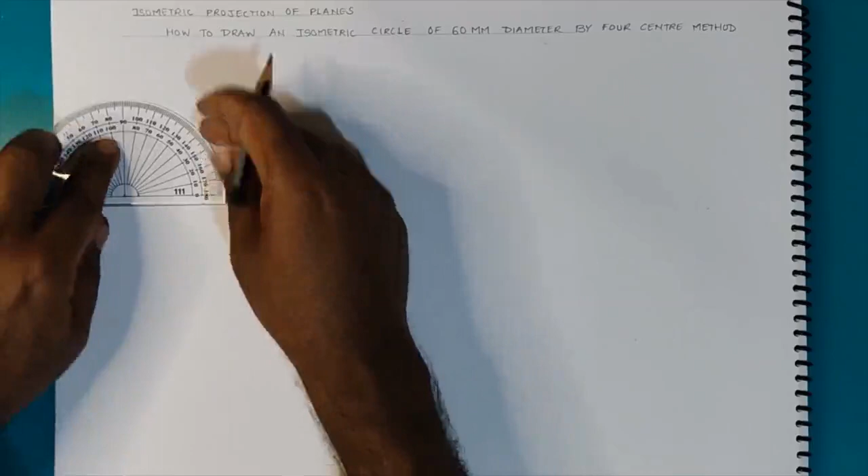We start the construction for the isometric circle by first drawing the isometric scale. We draw the horizontal x-axis and vertical y-axis, and lines inclined at 45 and 30 degrees. We use a protractor to find the angular divisions, then construct the lines as shown.

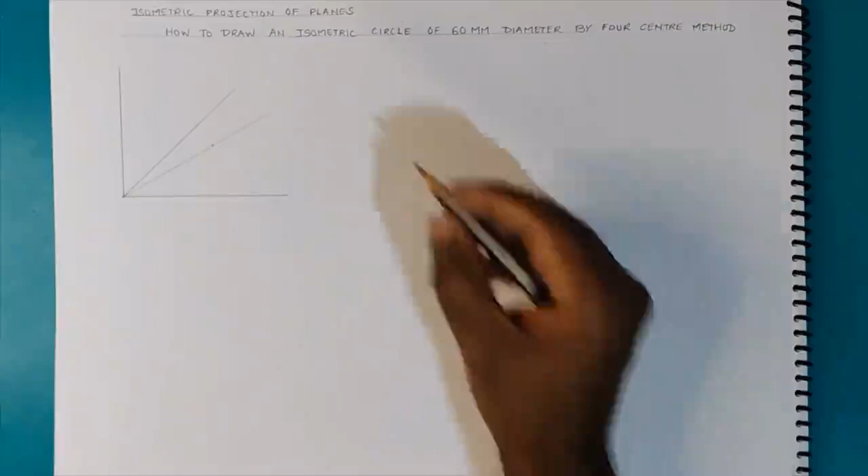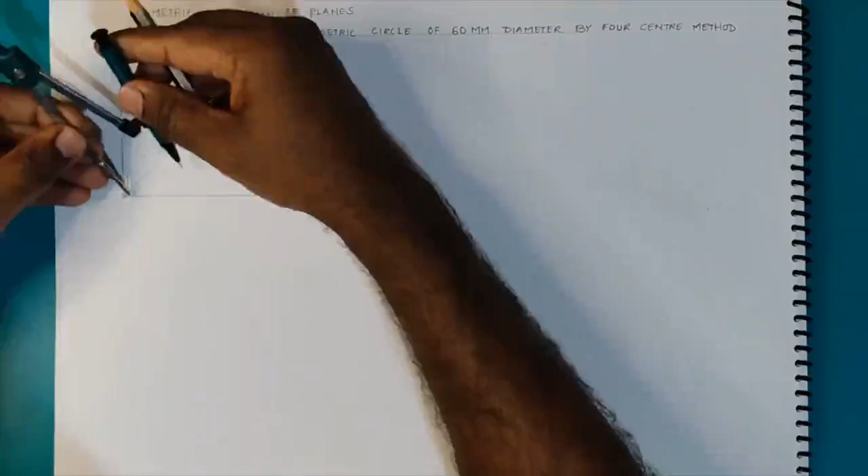I'll be taking only the distance that is required. Here the radius of 30 is required, so I take a distance of 30, and since I may need a 60 mm distance as well, I take 60 mm on the true length axis, that is the line inclined at 45 degrees. I have taken these two divisions, and this represents the true length.

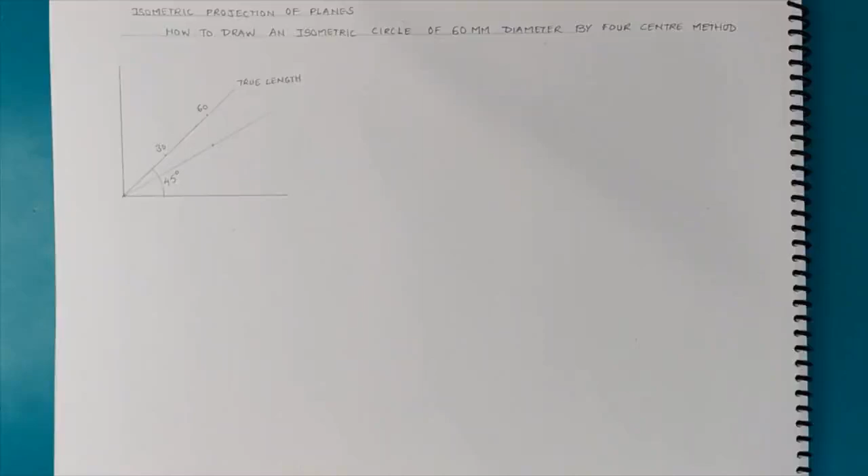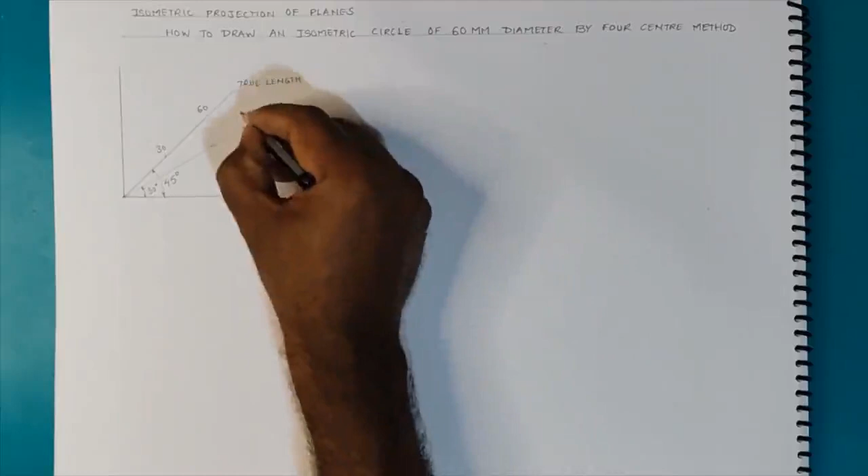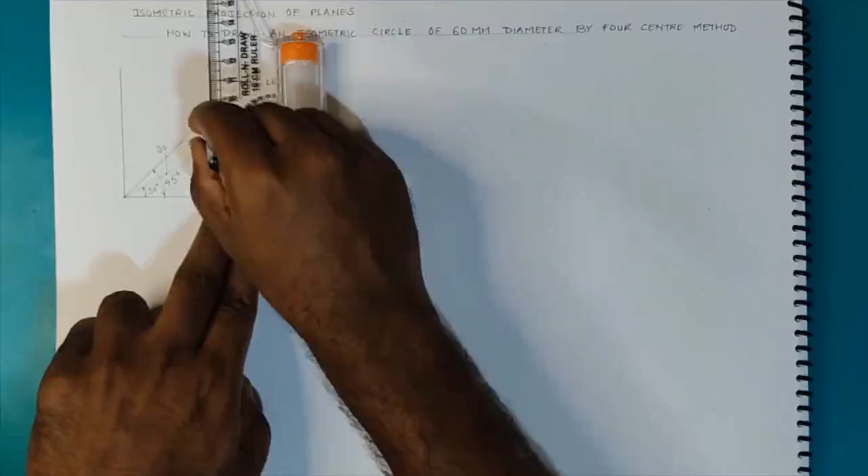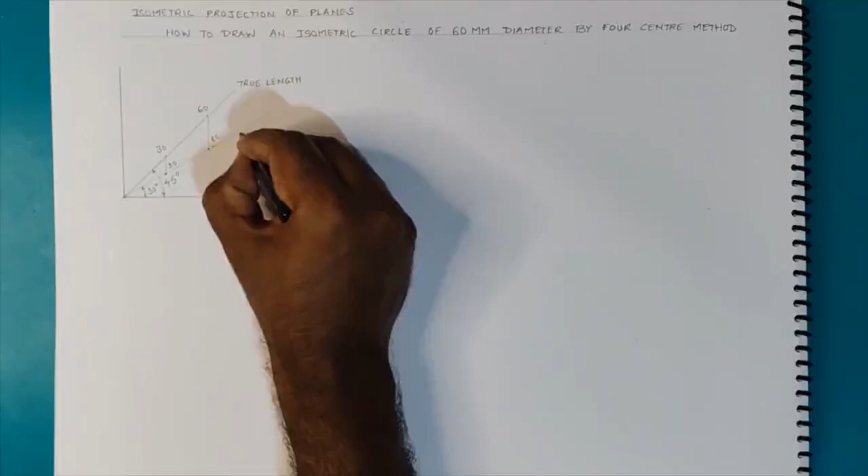From these two divisions I'll be drawing perpendiculars onto the line inclined at 30 degrees. From the 2 points I had marked earlier, I draw perpendiculars to find the intersection with the line inclined at 30 degrees, as shown. These points are the isometric lengths of 30 and 60 mm, so I mark it as isometric length.

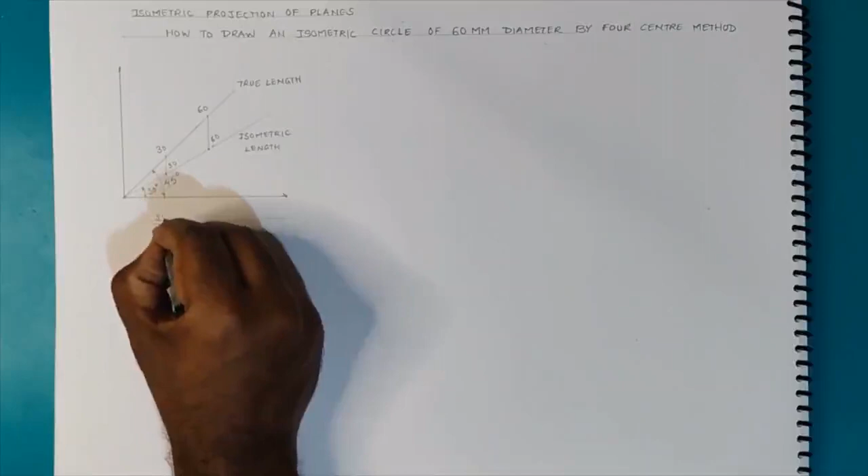Now this is the isometric scale for the given problem.

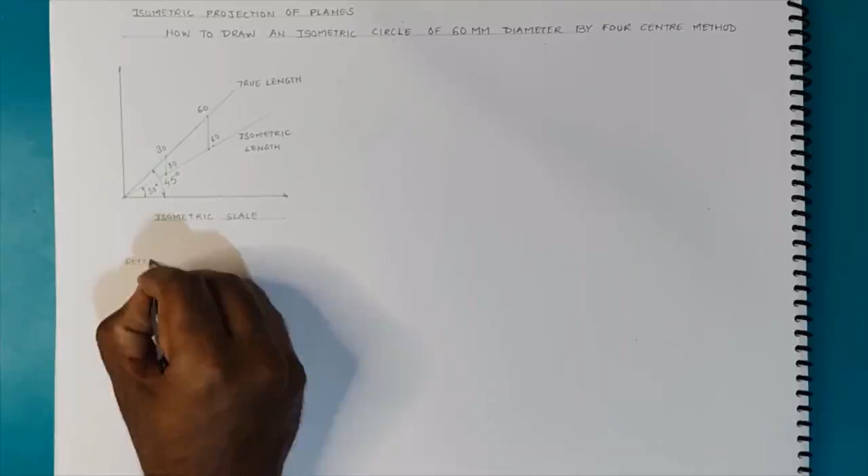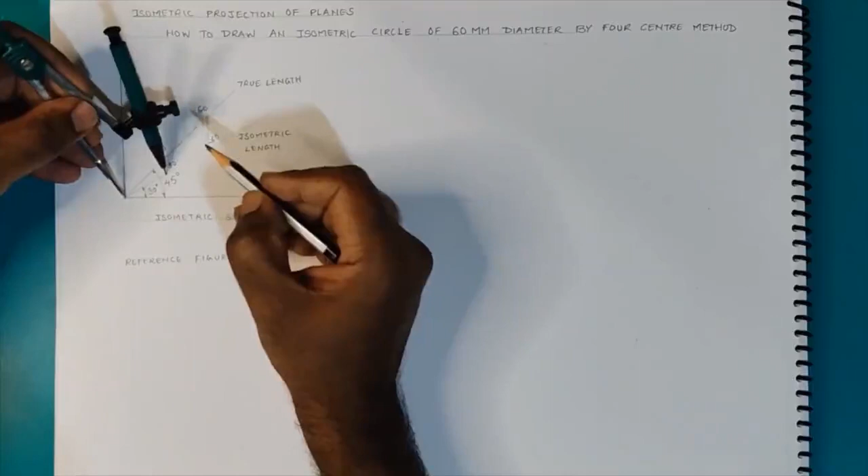I use the isometric 30 mm length for constructing the reference figure, which I will be utilizing for construction of the isometric circle. So I have taken 30 mm on the isometric length and I am drawing the circle.

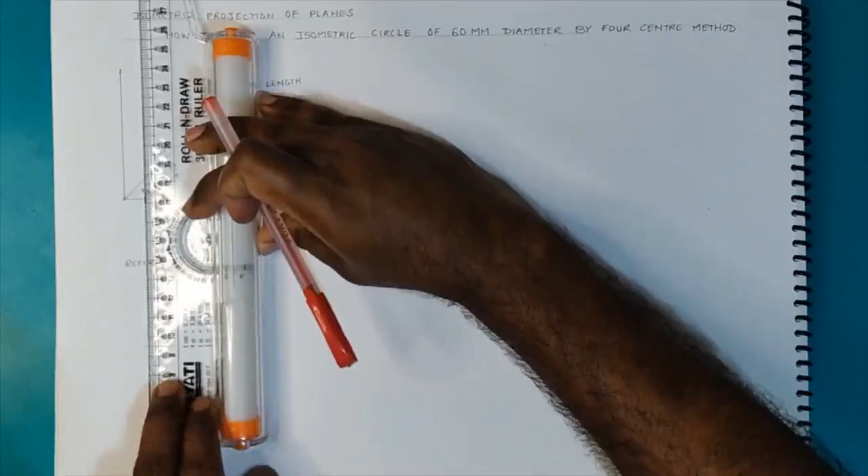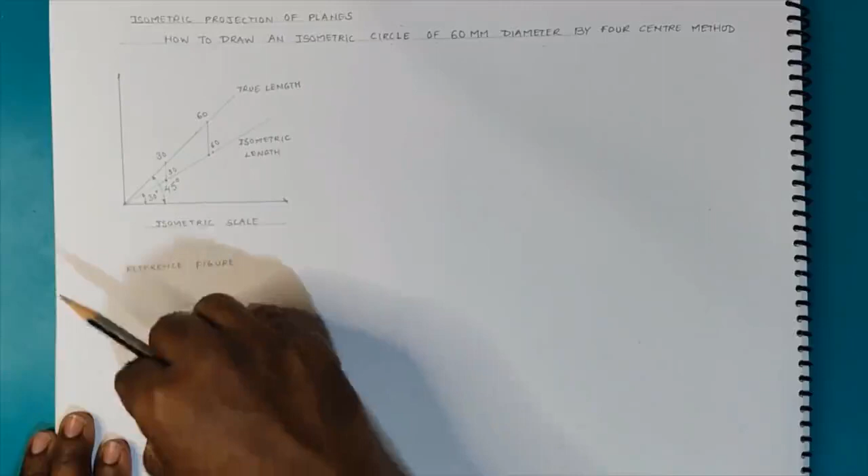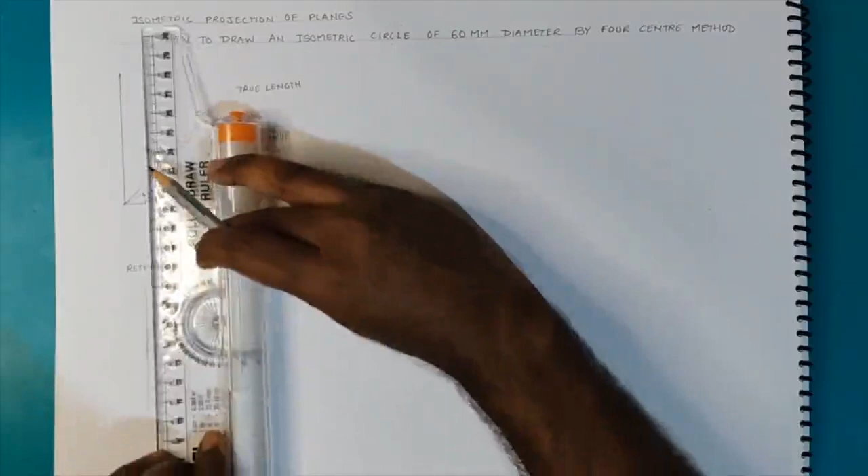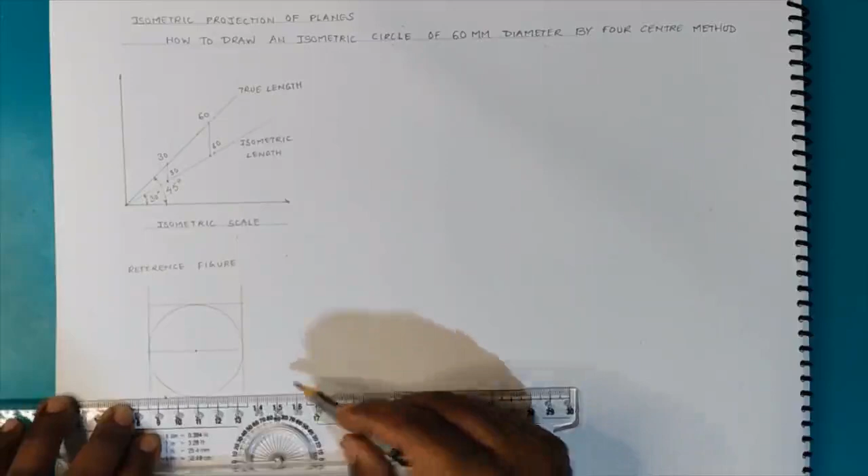I enclose this circle within 4 tangents which form a square. While drawing tangents, be careful that they are perfectly touching the circle at a single point; tangency should be perfectly maintained. I am drawing vertical tangents and then horizontal tangents, which gives me the reference square. I also find the center for the square.

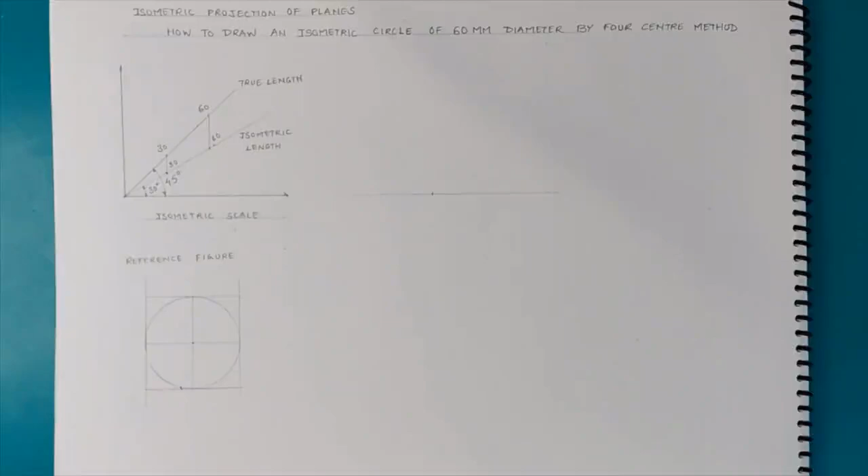Now I'll use this reference figure for constructing the isometric circle. I draw the isometric axis starting with the horizontal line and a point about which I'll measure the angle of 30 degrees on either side, and a vertical 90 degree angle using a protractor. I draw the axis line.

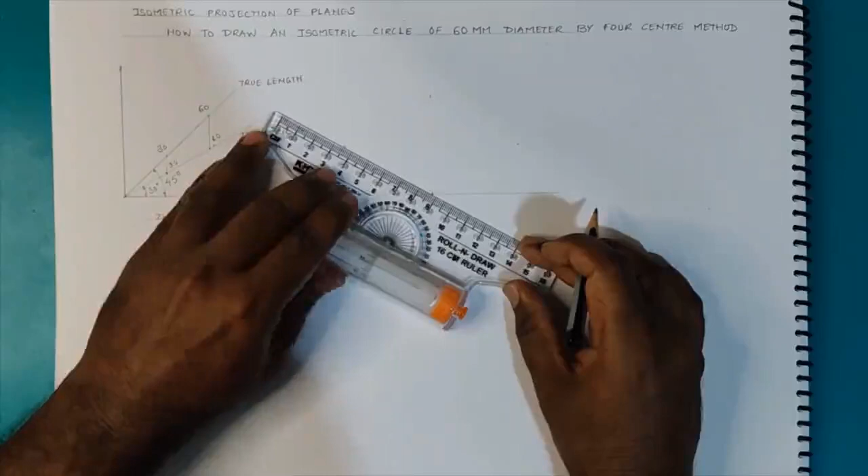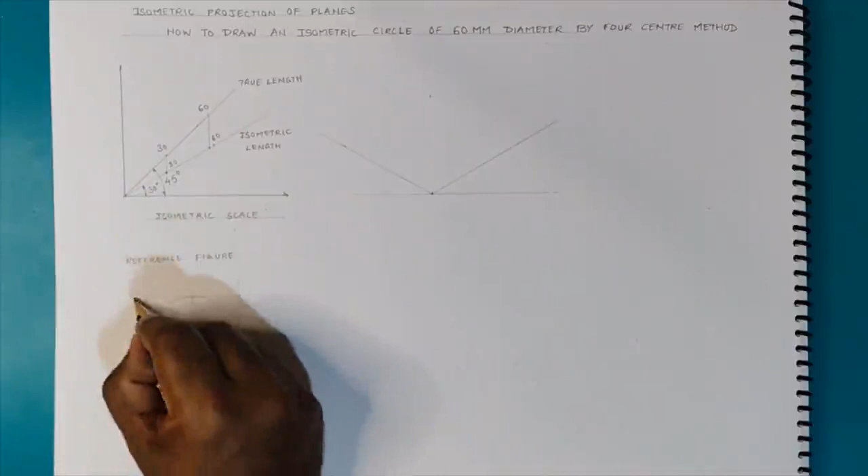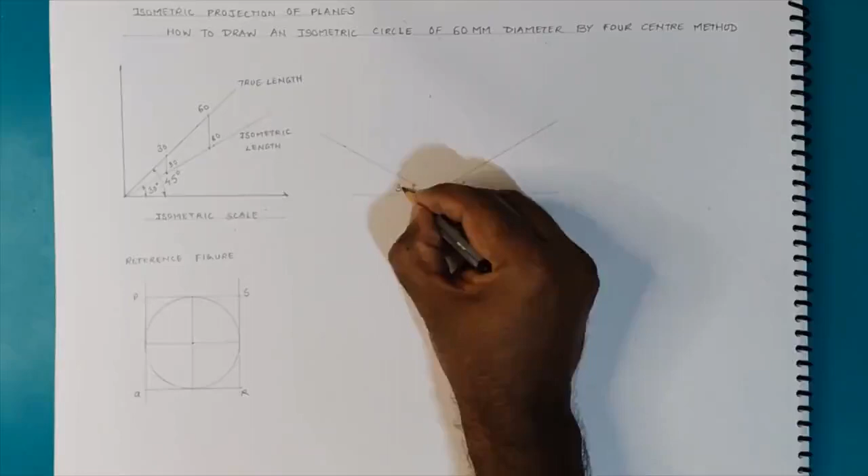So the isometric axis is inclined at 30 degrees. I name the corners of the square PQRS, and I will draw this square on the isometric axis, which is inclined at 30 degrees to the horizontal.

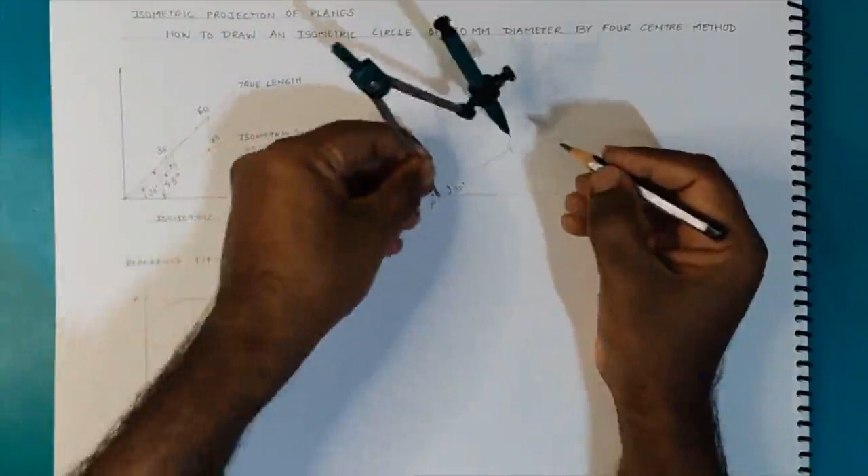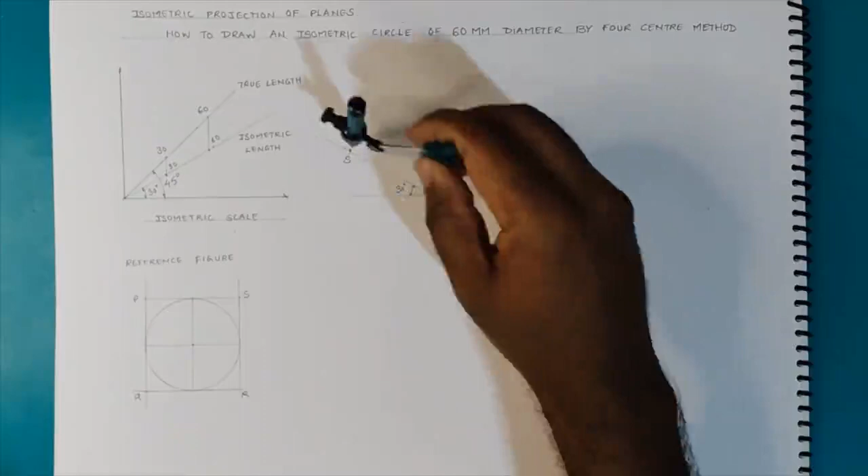I take the distance PQ, the side of the square, on my compass, keep it on P, and mark point Q on the isometric axis. Similarly, I take the distance of the side of the square to find point S. Using the same distance, I draw arcs through points Q and S to find the location of point R.

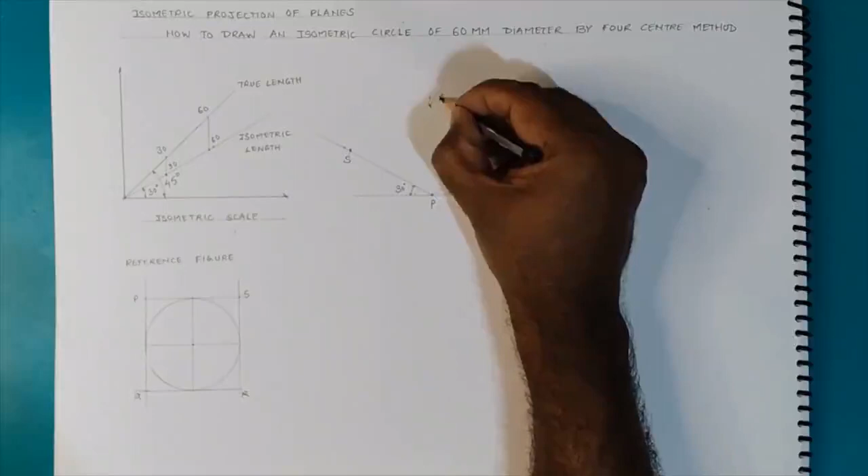I join all the sides of the points that I have found, and I get a rhombus construction.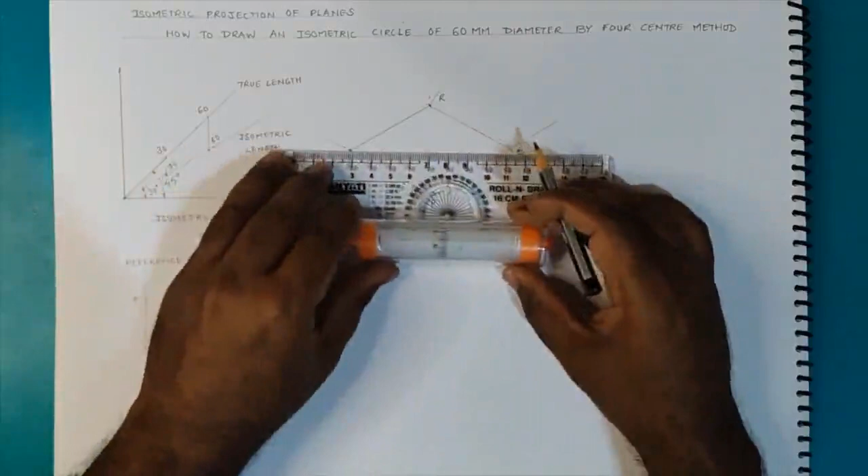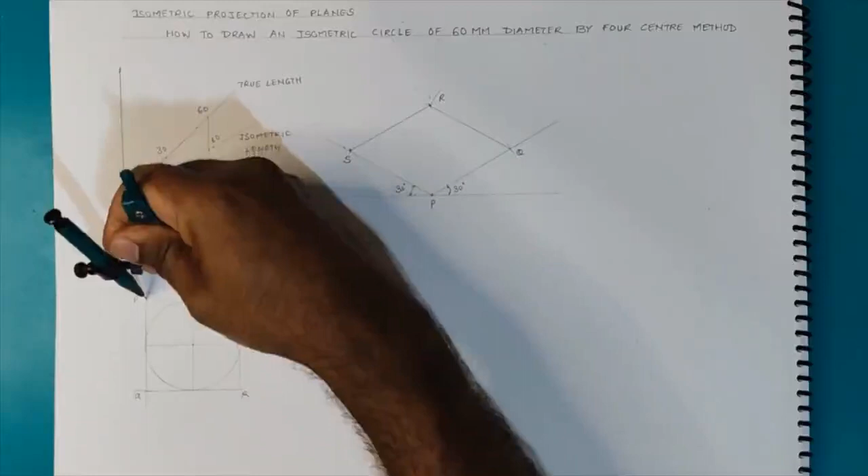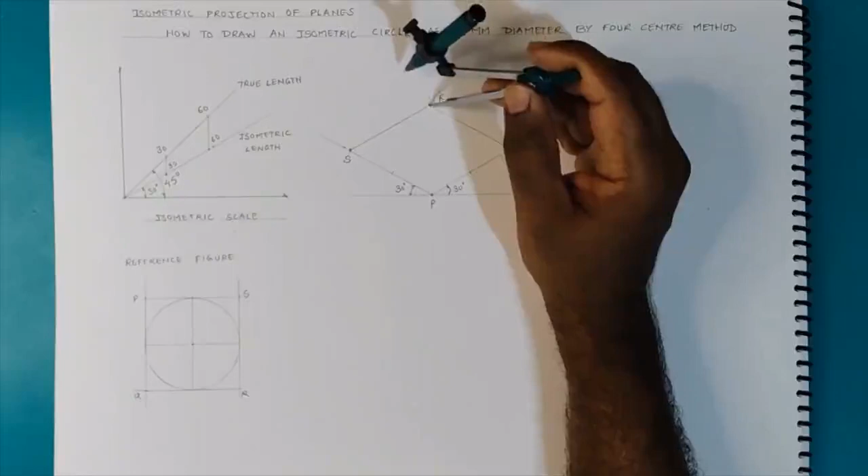Now I can locate the center of the given rhombus, which represents the isometric representation of the square. I locate the centers of the sides using the reference figure, taking distances from it to find the center of all sides. If I join the opposite centers, I get the midpoint of the rhombus.

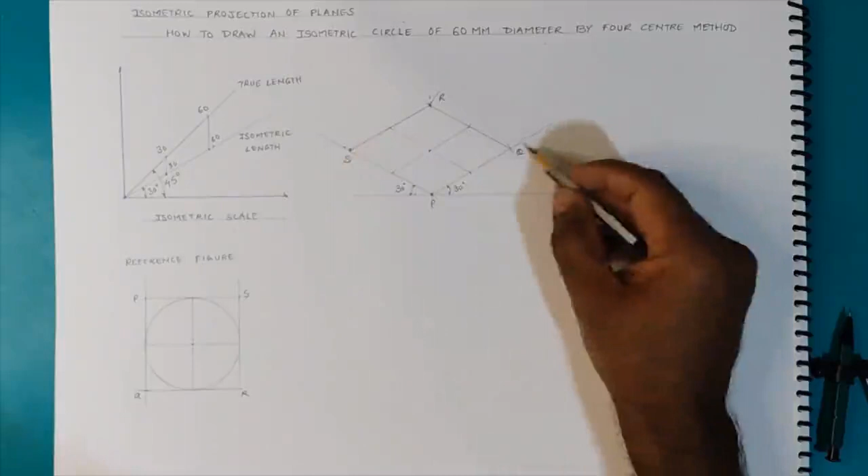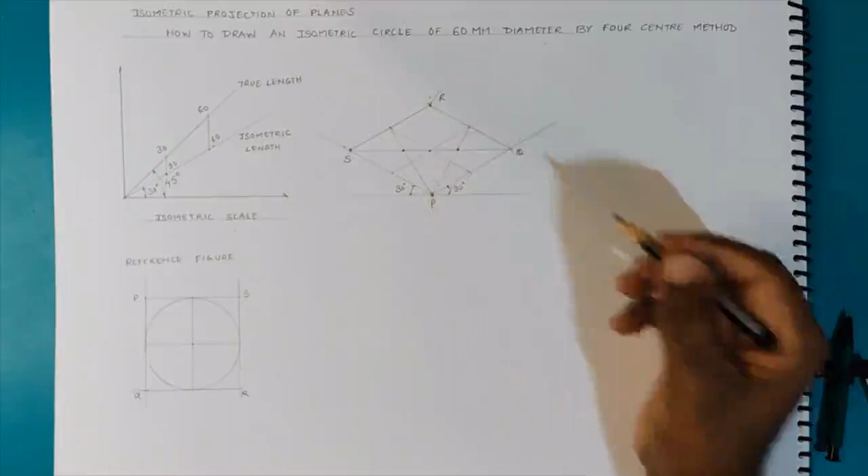Next, through the acute angle corners, I draw a diagonal line. Now through the obtuse angle corners, I join lines with the opposite midpoint of sides. The intersection gives me two centers, with the remaining points being the obtuse angle corners.

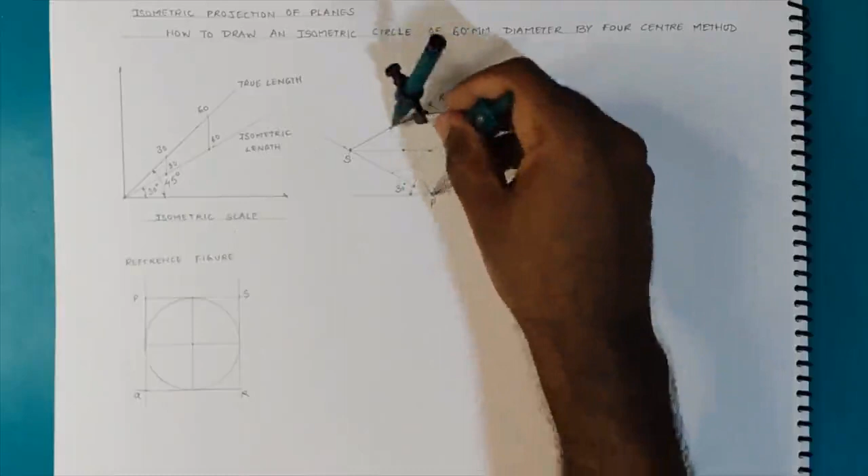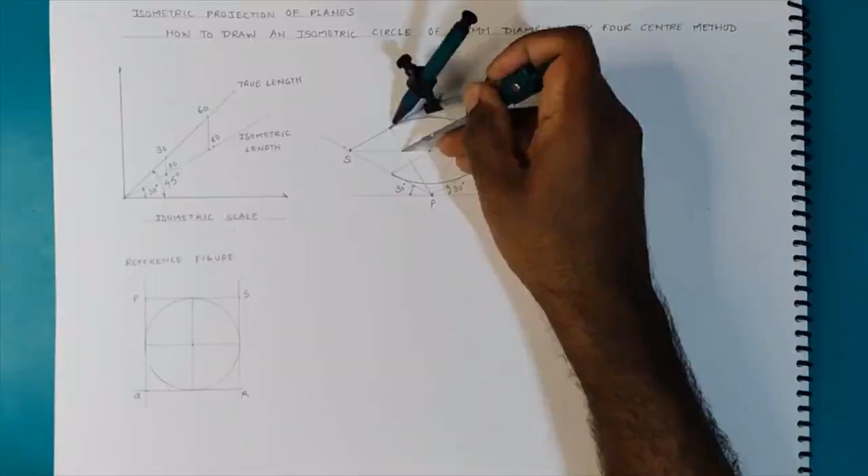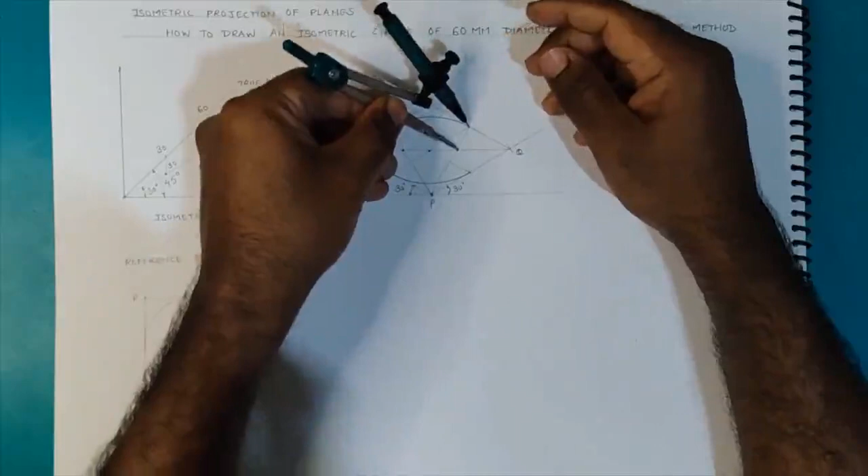Through the obtuse angle corners, I take the radius up to the opposite side midpoint and draw an arc. I do the same for the other obtuse angle corner, and through the intersecting points obtained earlier, I take the radius up to the midpoint of the side and draw an arc to complete the isometric circle. This completes the isometric circle construction in a horizontal plane.

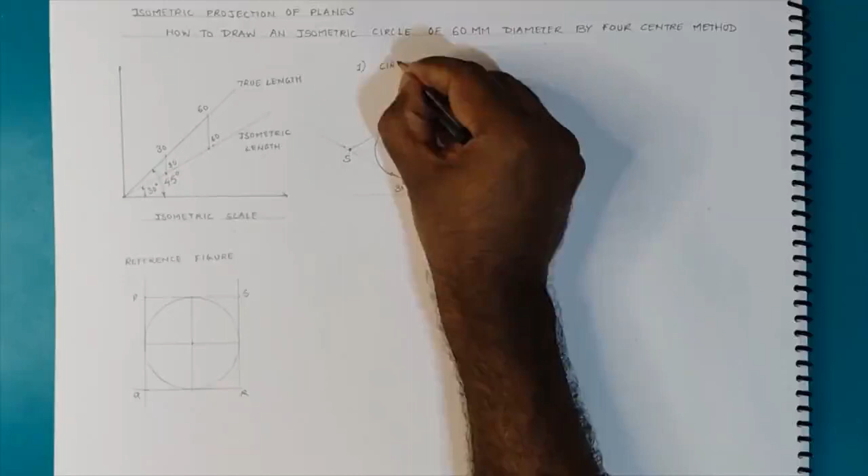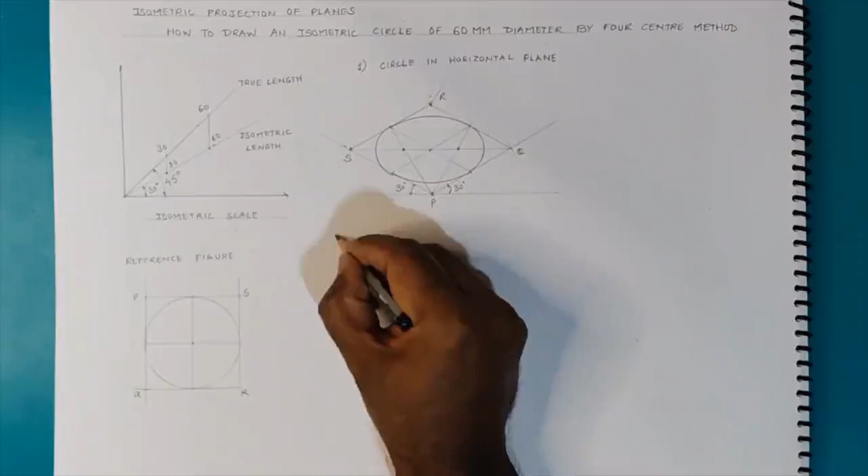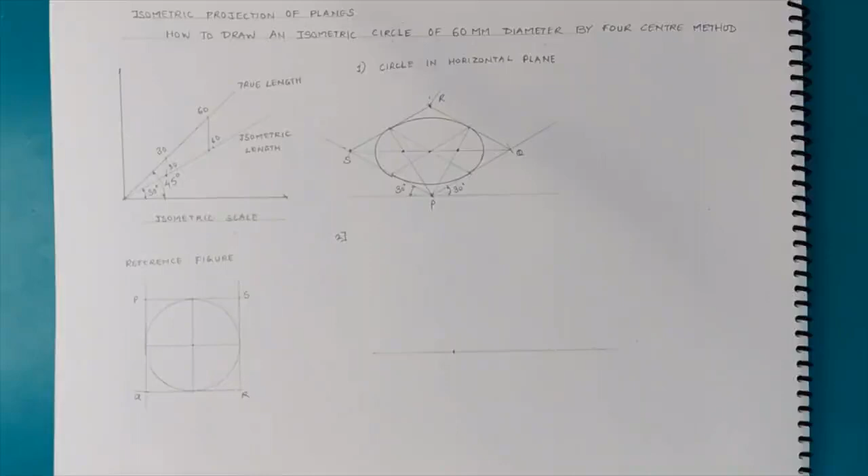Now I'll construct the isometric circle in a vertical plane. I take a starting point on the horizontal, measure angles at an inclination of 30 degrees and vertical, and draw the isometric axis.

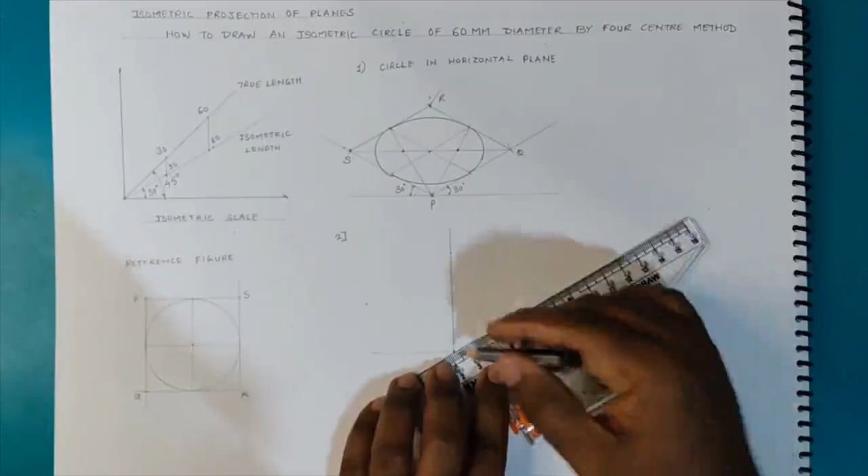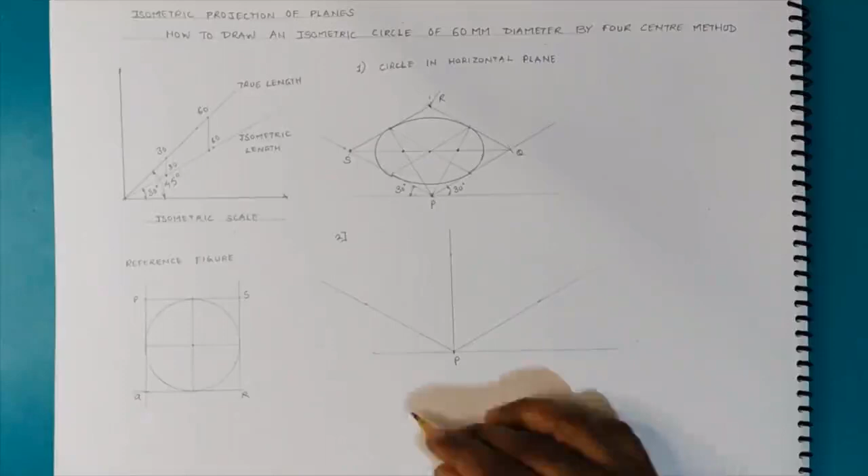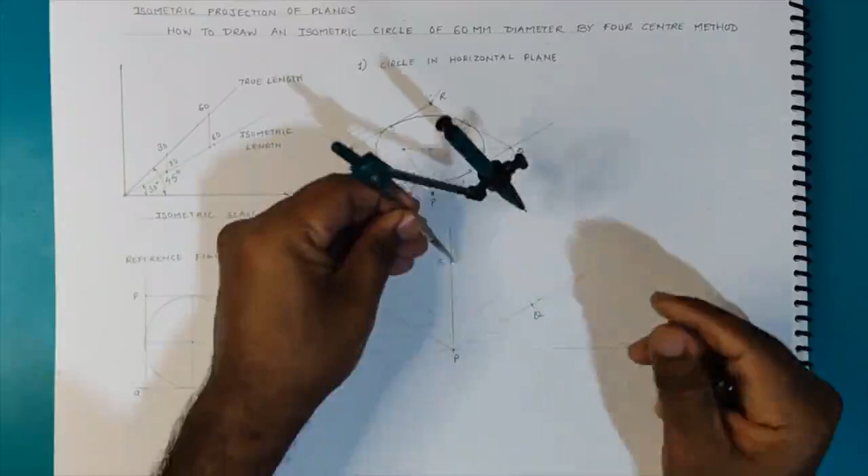I take point P as the starting point, and using the reference figure, I take dimensions from it to find the location of Q and S on the isometric axis. I find the location of R by drawing arcs through points Q and S, and complete the rhombus, which is now in the vertical plane.

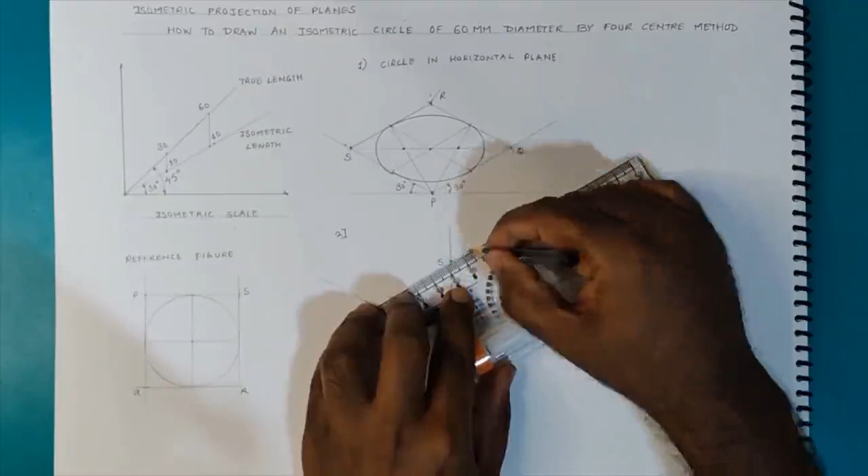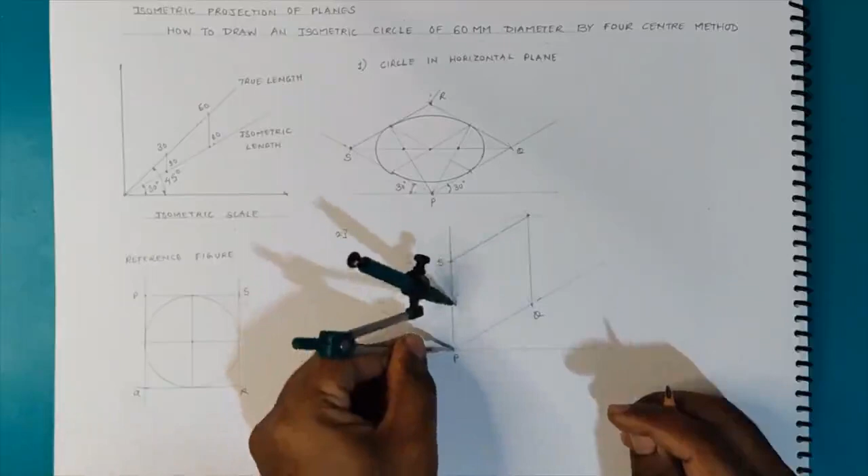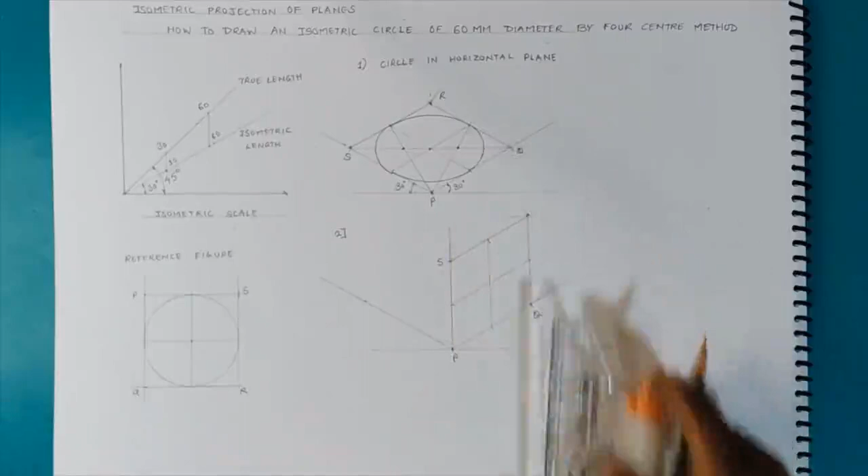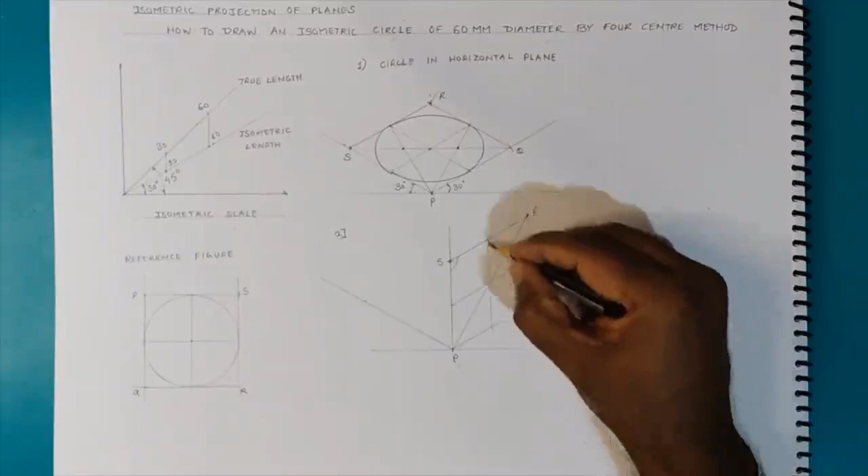I take distances from the reference figure to find the midpoints of the sides, then find the centers. Having located the center of the plane, through the acute angle corners I join the opposite corners by a diagonal line, and through the obtuse angle corners I join lines with the opposite side midpoints. This gives an intersection with the diagonal line, which is the center for the arcs of the isometric circle.

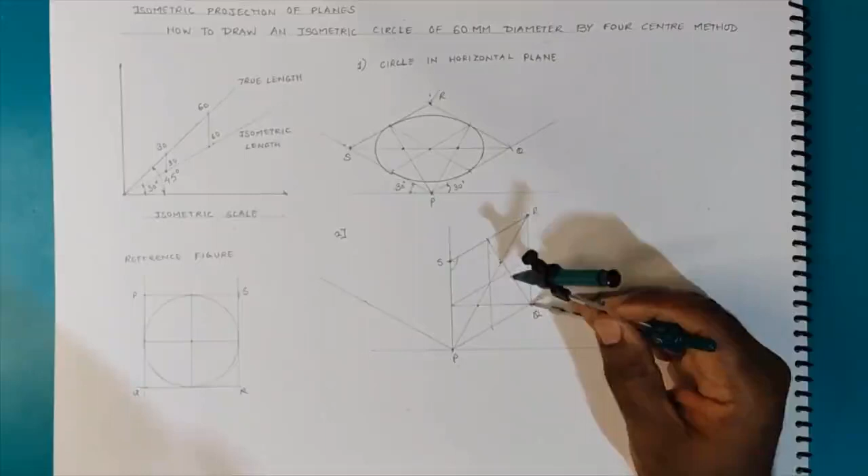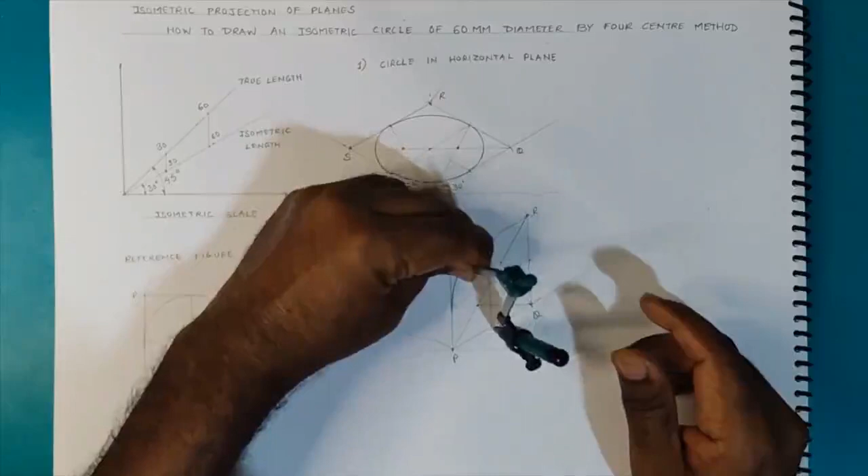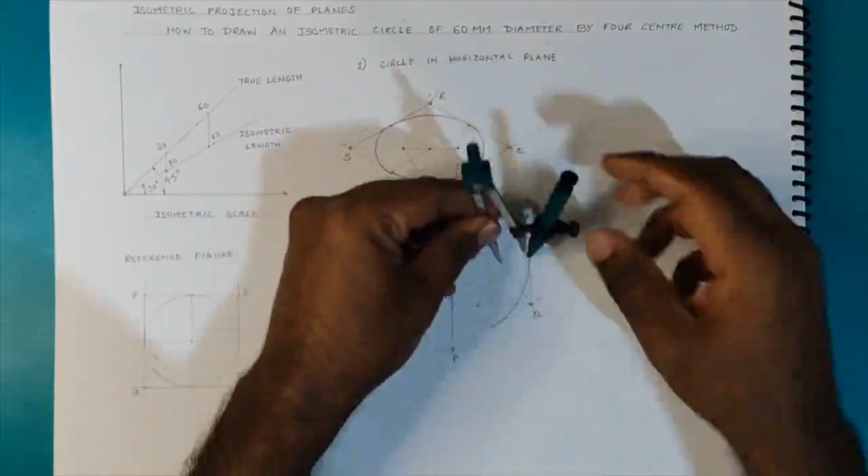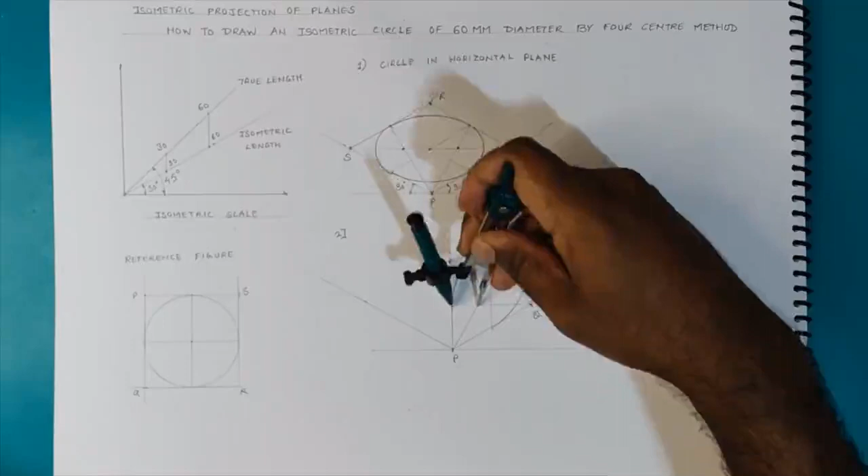From the obtuse angle corner, with the radius up to the midpoint of the opposite side, I draw arcs. From the earlier found intersecting points, I take the radius up to the midpoints of the side and draw arcs to complete the isometric circle. This completes the isometric circle in the vertical plane.